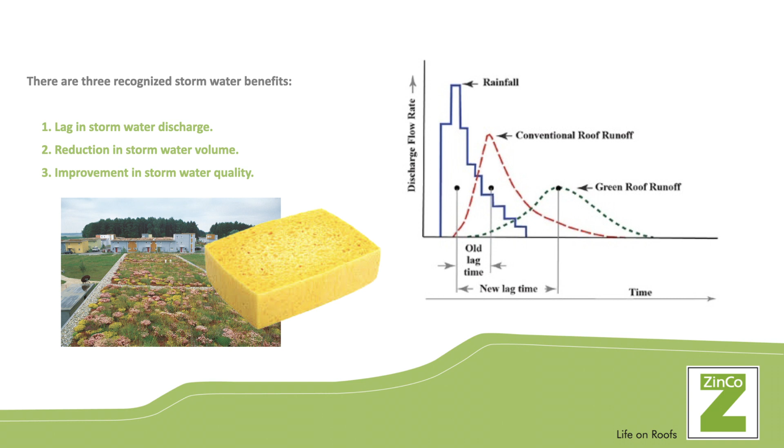Toronto is a combined sewer system. 20% of our sewers also have toilet sewage in them. So when we do have a big rain event, we get poo that kind of gets pumped into Lake Ontario. And that's primarily why you'd never swim there.

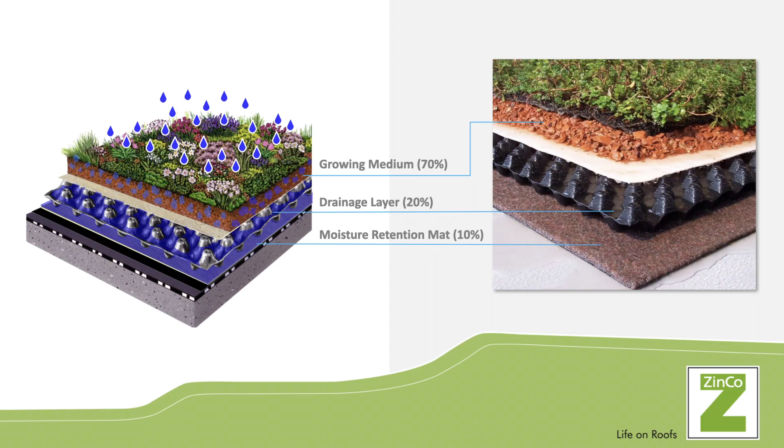Within a green roof, the water absorption factors primarily are within the growing media. 70% of the water is held there, 20% in the drainage board, and then 10% in what you'd call a moisture mat or a protection mat. You really want to protect the roof membrane, and that's kind of the final layer there, as well as a root barrier that would go on top. Classically, the layers are root barrier, protection mat, drainage board, filter sheet to maintain an air gap between the drainage board and the soil, and then your soil and plants.

There's two different approaches. There's a modular approach and a built-in-place approach. Modulars are like a 1x2 foot tray that you can plunk down on a roof like Lego. Built-in-place is everything shows up in rolls or sheets and you assemble everything on the roof.

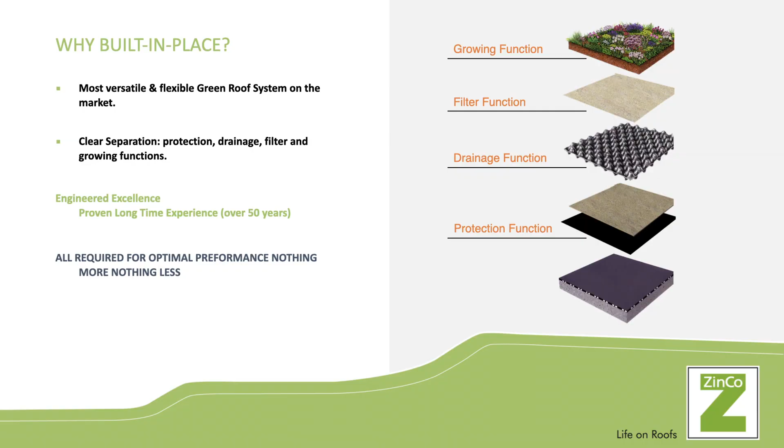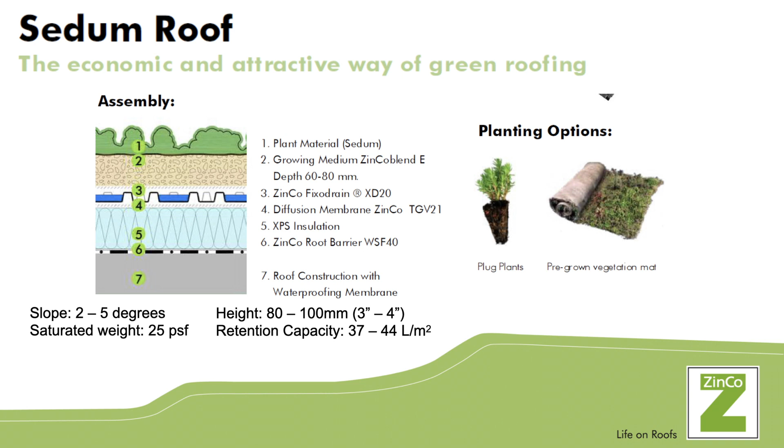This is the most classic green roof. This is an extensive green roof. It's been around for probably the longest amount of time. It's lightweight and very widely installed, but not where the market's actually moving, which is where I'll go. These are what you would, I'd say, most commonly see. So that's kind of an example of a pool house. There's a Canada goose that nests here every year. I didn't get that photo, but we're also providing some habitats. This is Ferndale Spa.

This is actually Peter Gilgan's spa from Mattamy Homes. This is a very interesting project. We installed this. We asked to swim in the lake after we installed it, and he had to call his lawyer to ask if we were allowed to do that. So,

sloped roofs. In a residential application, we see a lot of sloping rooftops. Green roofs can be anywhere from a 10 degree to a 45 degree pitch. And the approach is entirely different when you do a sloped roof because you're dealing with shear forces on the roof. Shear forces are basically the natural inclination of a green roof to want to slide off the roof. So it's very much more engineered when you do that.

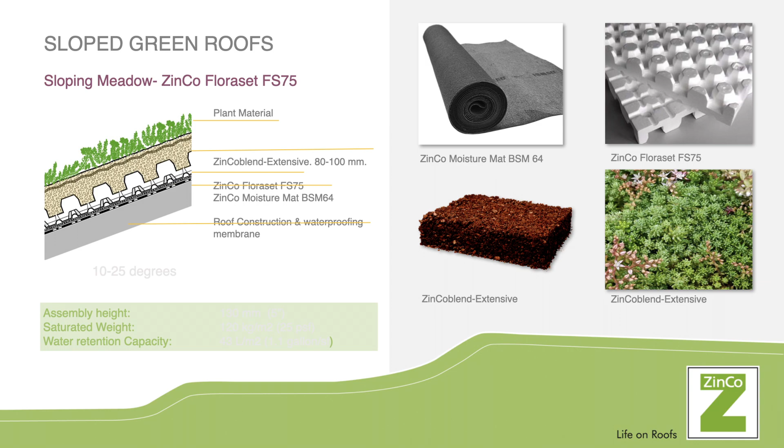You have to create what's called shear barriers, and a shear barrier will mitigate those shear forces. And the entire structure of the building is really quite differently designed to accommodate that load. So these are the base layers being installed.

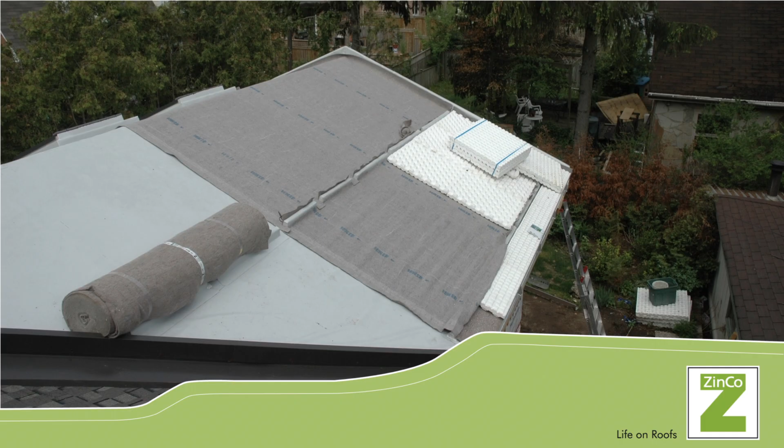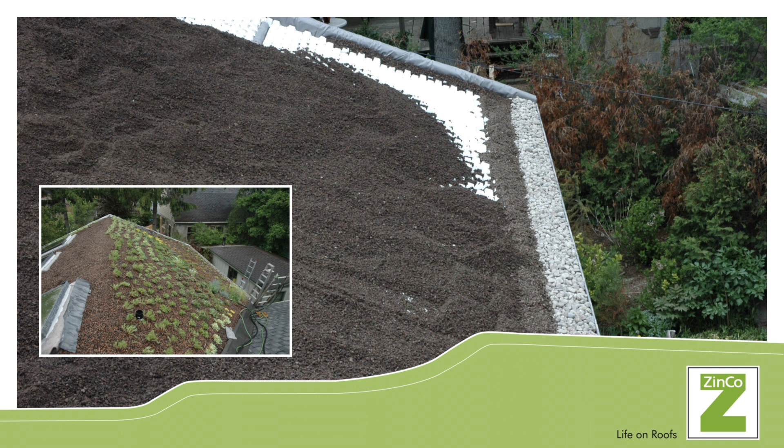Unfortunately, that element there is styrofoam. We don't use that anymore because it's really quite bad, but that was what was once very common for this type of application. That's a growing media that's very aggregate rich. The purpose of that is to facilitate drainage. One of the most important things with a green roof is actually retention, but also the rebound rate. You want the roof to get ready to absorb the next rain event. And then that's the roof completed.

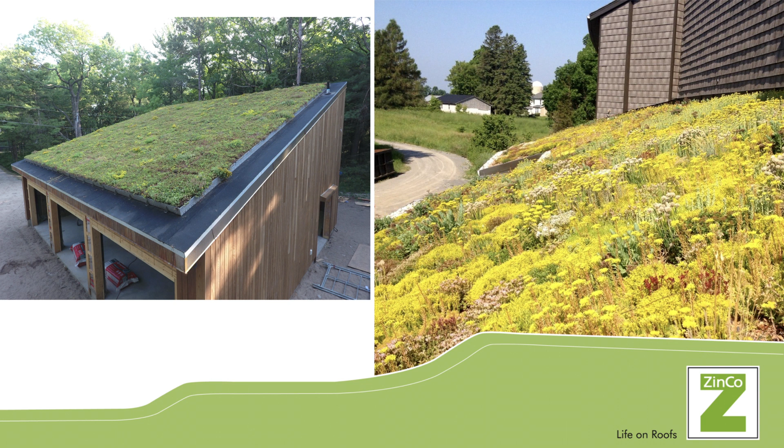From extensive green roofs that I talked about before, this is where the market is going, and this is where it really should have always been. Where you take nature to build, you should try to replace it. So we're displacing earth. Maybe the rooftop can be used as some kind of new habitat for it.

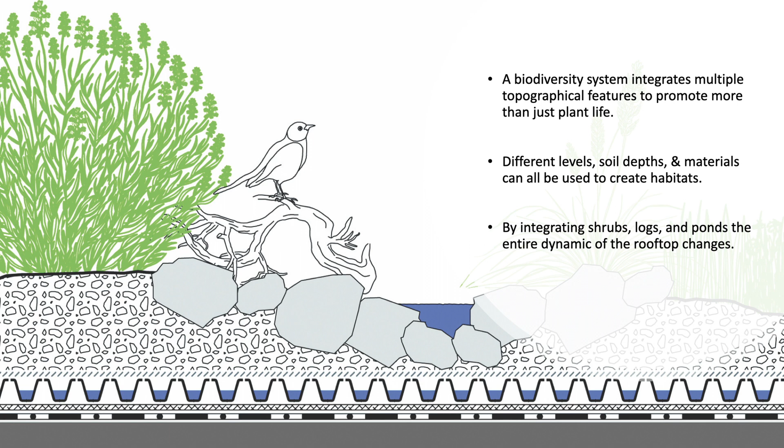It's a system that integrates multiple different features. You can do different soil depths, different levels. You can put logs on the roof. You can have ponds. We've done and tried all of that. Ponds are extremely tricky, but everything else is pretty easy to do. And you can end up with something like that.

There's no reason other than structural design for this type of roof to not be more common. You're adding a lot more value to the environment for pollinator pathways, birds, insects. You're creating new habitats.

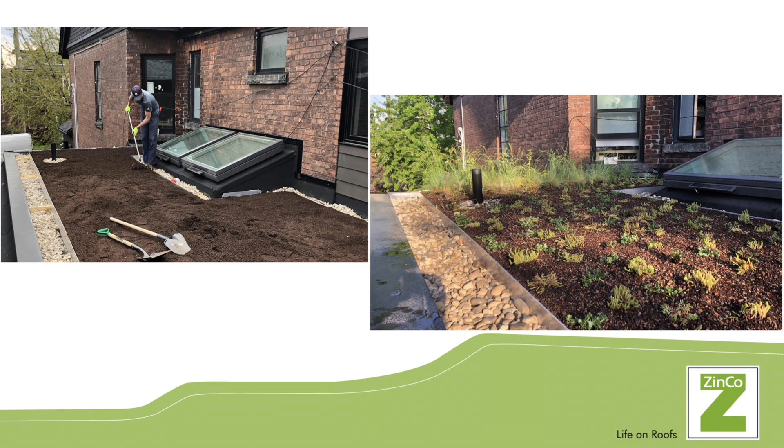This is 49 Delaware. This was an adaptive reuse project where we used all native plants. So we took an existing flat roof. We converted it into a biodiversity area. All of the windows of their children's bedrooms look out onto the roof, so the kids were very excited about that. And this is it just after planting. So we took what was just a SBS 2-ply membrane, and we converted it into a natural habitat.

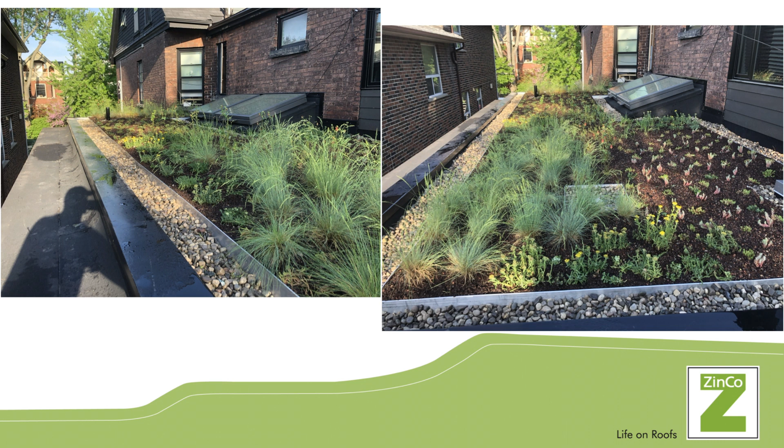This was a focus for people who were actually wanting to produce honey, I believe, which in the context of sustainability, honeybees actually aren't very good for the environment. But we did a pollinator garden for them using all native species. And we had 8 inches of growing media, so that's 200 millimeters, plug planted with 4-inch pots and 1 gallon pots as well.

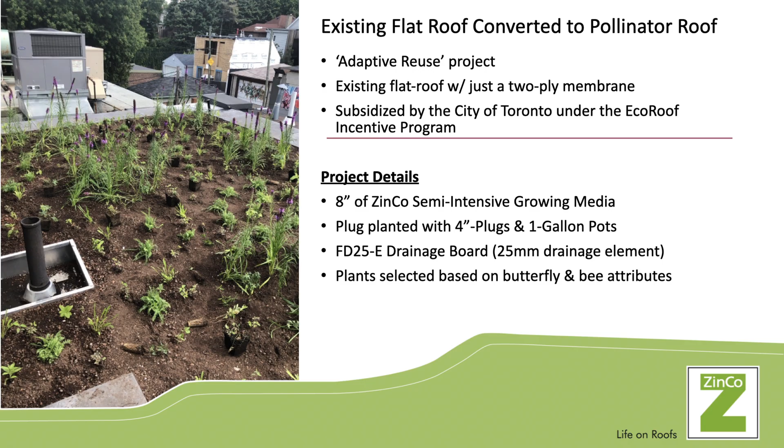This also was an existing roof, but it had been pre-engineered to have a pollinator garden on it. And importantly, subsidized by the City of Toronto. So there's an eco-roof incentive in the city where they'll pay what works out to be about 40% of the cost. They'll rebate back if you do a green roof voluntarily. And those are proceeds that are generated by the green roof bylaw that they will use to pay people to voluntarily green their assets.

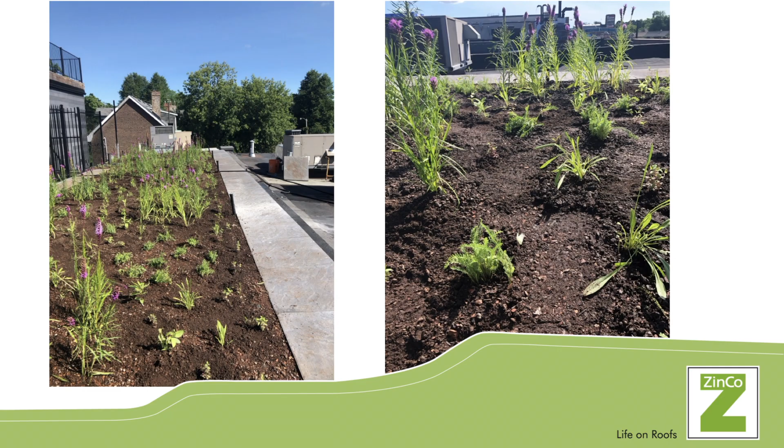And then some photos. So we kind of saw the reintroduction of insects and different types of animals onto the roof as a result of doing something like that.

So one of the initiatives that should be present amongst buildings and what we do and all of our colleagues, we should be focusing on biodiversity being the new normal. Restorative practices for the environment should include the idea of pollinator pathways in urban settings. There's some very interesting research showing different biodiversity roofs in a city in London and the actual migration of different pollinator species across the city as a result of that. And all of that, of course, is to promote new habitats for insects, birds, and animals.

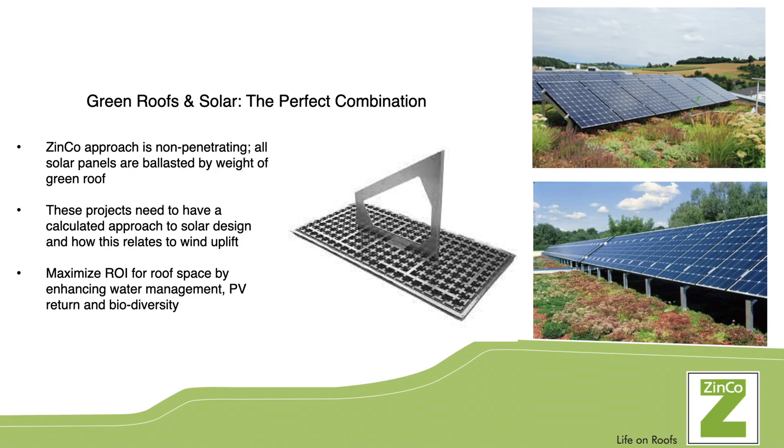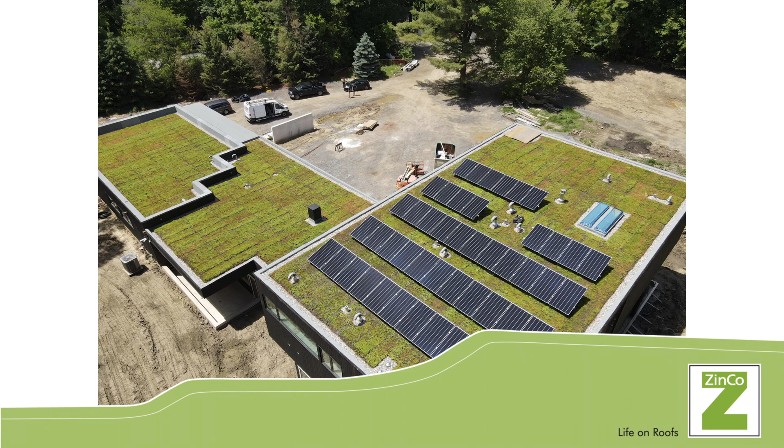This is a project in Dundas, Ontario. It was also a microgrid. So all the energy produced on the roof was stored in a battery that was subsequently utilized throughout the day or stored to be used later during peak times, which I guess is during the day. But this home also is a behemoth and not sustainable at all. It's 8,000 square feet and ridiculous, really. But we were happy to help out.

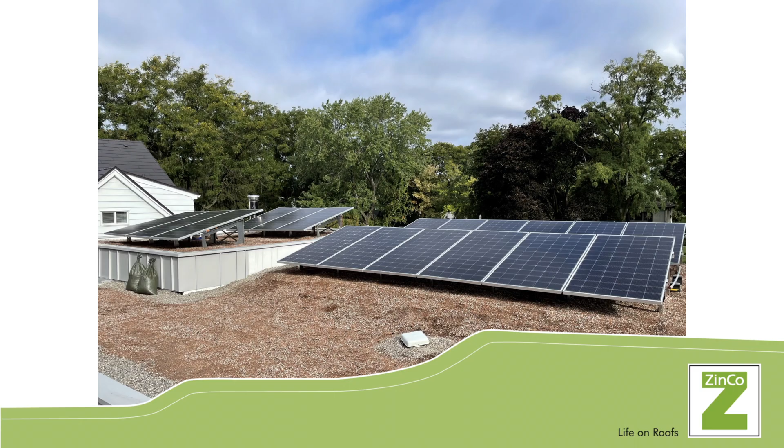This is a project by the owner of SMPL, Joel Tanner. This is his house in Hamilton. Also turned out to be a microgrid, not nearly as big as the last one, and actually quite a good focus for him on sustainability.

This is just an image of the underside. So there's the racking that's connecting directly to what would be called an SB200 drainage board. That is just the ballast mechanism, and that racking is installed first, and then the soil is installed on top, and then everything's planted. Nothing's adhered, nothing's penetrated, everything is just ballasted by the weight of the green roof.

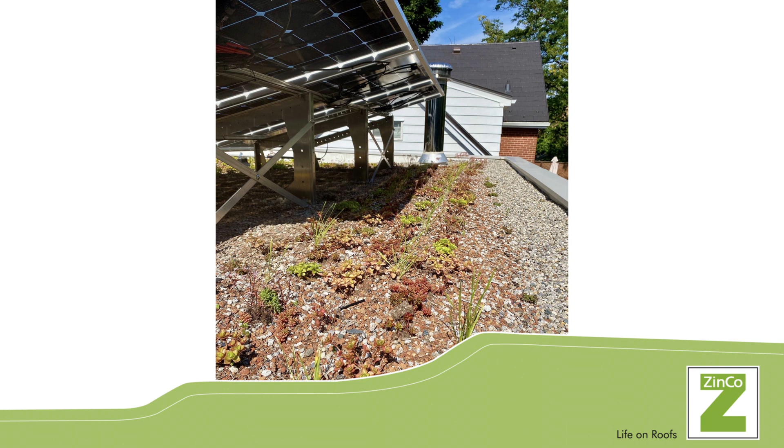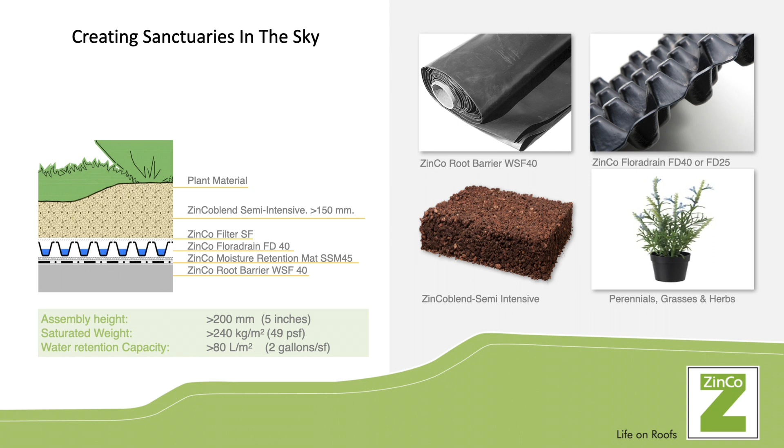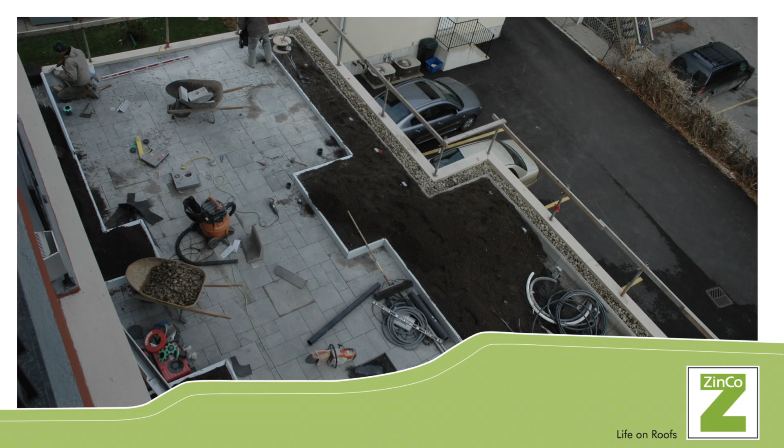And then finally, you can do something more like an amenity space with green roofs, and this is out of Burlington. So this is the McCann residence, also pre-engineered, but sat like this for a while, and then we came in and did a design and consulted on the supply and installation. And you can turn what was once just an unused space that they did plan on using into more of a patio amenity area. Everything is built on top of our drainage board, so you have one even plane of drainage underneath everything. And what you end up with, something more like that.

And then finally, this is one of the newest trends in Toronto at least, laneway houses and building garages. We're seeing a lot of people utilizing the rooftop of their garages or getting an easement from the city to build a laneway suite. Part of that is instituting a green roof. So we've done a lot of work on that throughout different laneways in Toronto.